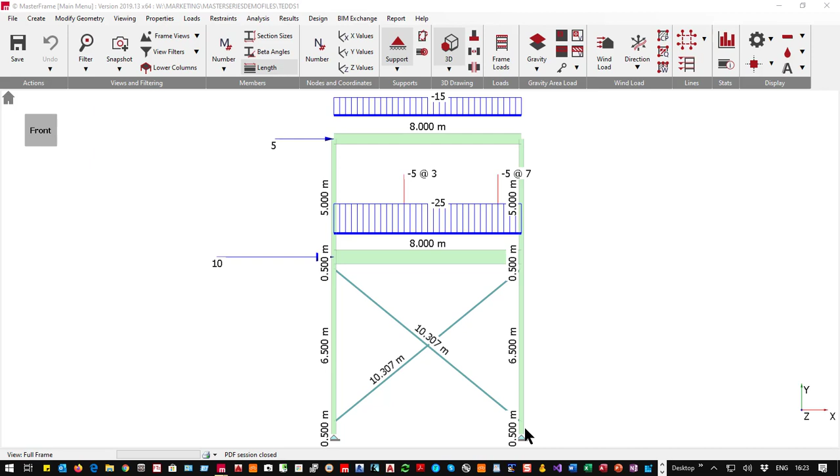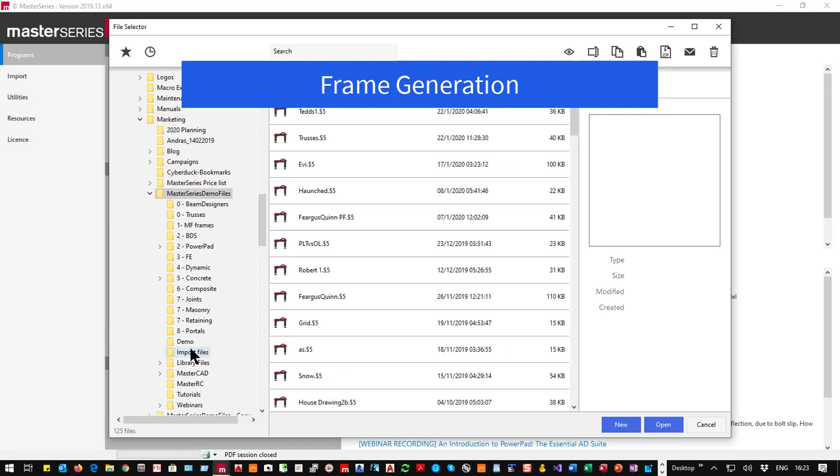So if I just come out of the software for a second, all the way, and start the MasterSeries, I'm going to start just as a PowerPad user and take a brand new file in MasterFrame, which is part of PowerPad, and we'll just go into the PowerPad directory and we'll save it as a new file called ppframe and create new.

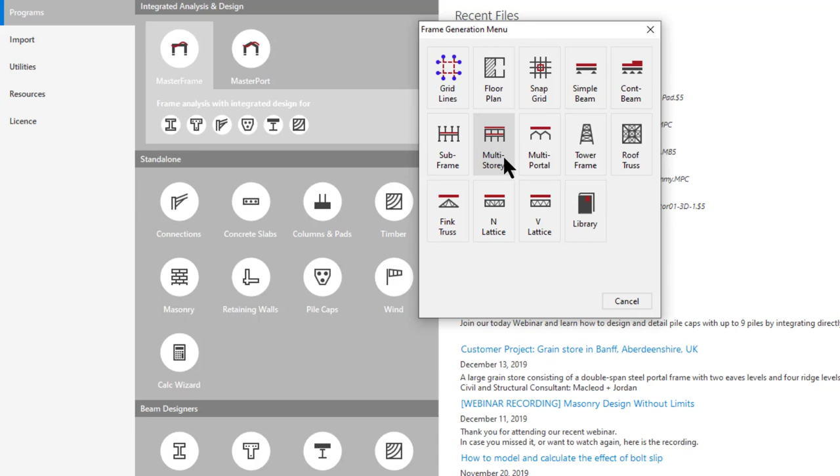So here we come with the basic preprocessor, and we could use the subframe or the multi-storey to start this off with for us, but we're not going to. We're going to do this all from scratch to show you how easy it is to do it from scratch. So snap grid, put it in the front view.

I'm going to do the columns first, so I'm going to choose a UC default column, and we'll come down to say the 23, and we will start at the bottom and we'll come up 7.5 meters, and then turning on my node points so I can see them and making them slightly larger.

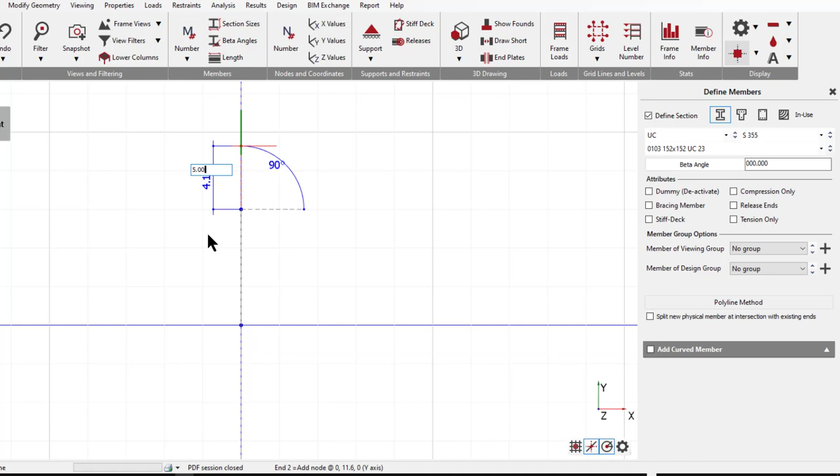There we go. I can now do another one that is 5 meters, and I don't have to go like that. I can go 5, 0.00, or input the coordinates on distances just like in AutoCAD. And I'll do the same at an 8 meter off center. So I'm just going to hover here and come across exactly 8 meters, type it in, it's quicker, and I will notice I automatically get a snap to the horizontal above that and to there.

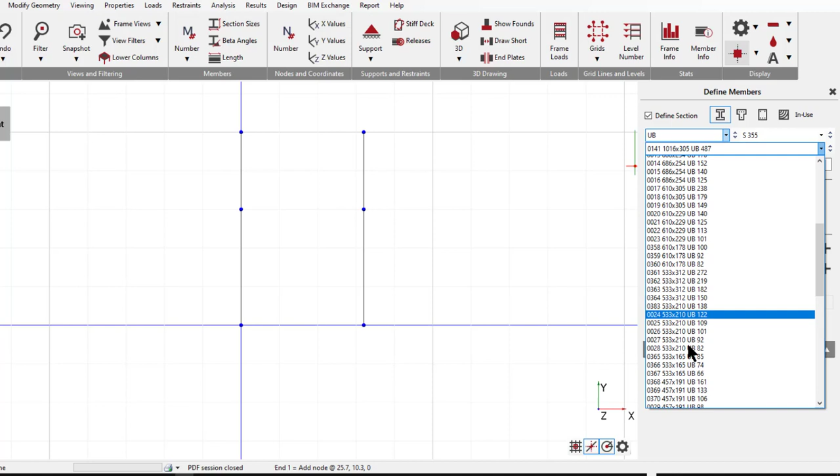So now I'm going to put in beam sections. So UBs, very simply, we're going to choose a 406 by 46 initially, and we will pin the two ends of the member. So we'll make it span from here to here and from here to here.

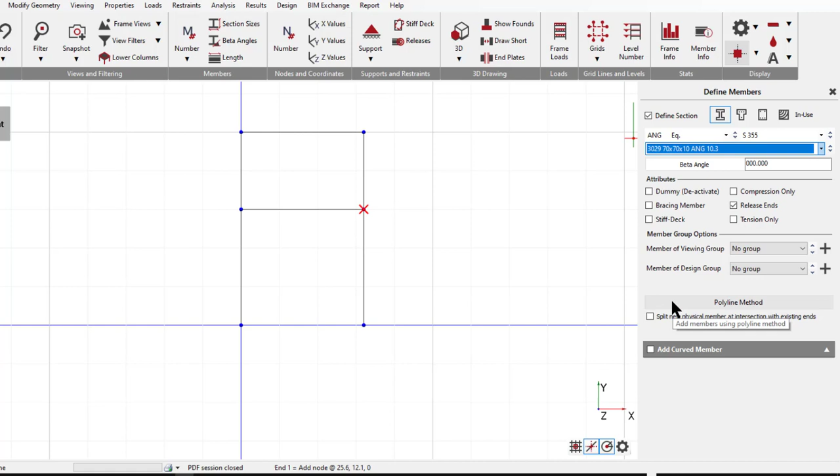And then we'll create some bracing members, and I'm going to go for an equal angle and use the British angles, and come down to a 70 by 70 by 10. So I'm going to make it releasing. I'm going to make it tension only as well.

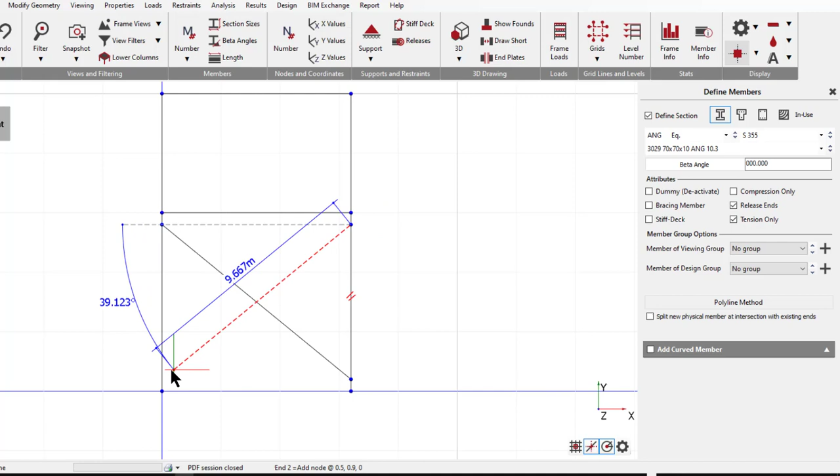So I'm going to do cross bracing, but I'm not going to put it node to node. I'm going to give myself a wee bit of room. So what I'm going to do is I'm going to come down 500. So just zoom in, and then I'm going to come up 500. So it's more realistic, because normally they aren't connected exactly at that. So those two are in, and I then just close that, and I don't need the node points anymore.

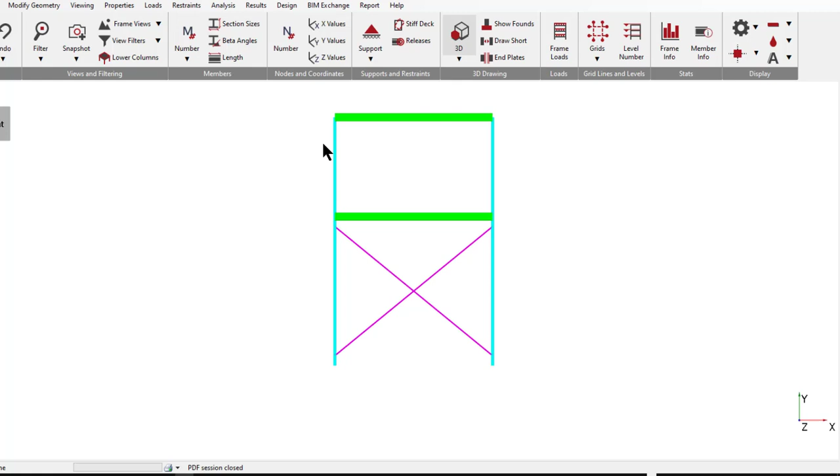Turn on my 3D, and I'll see my basic profile. And if I ask the color by section, you'll see the 3 different section types that we have used, and we could even ask for a legend on those if we wanted to, just to confirm that they are all default sections and they're all 355.

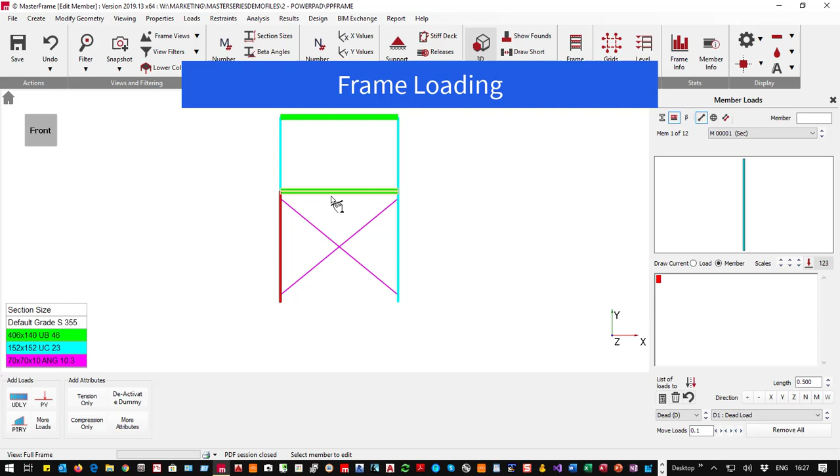So now I want to put some loading onto it, and we go to loads and member loading. This is a plane frame, we're not using area loading, so we just go here, just get rid of that little key diagram, and I'm going to put onto this 2 UDLs plus 2 point loads.

So the first UDL is going to be a dead load of say 5 kilonewtons per meter run. The second one's going to be a live, so L, and it's going to be 10. And then going to have 2 live point loads of 5 kilonewtons each at 3 meters and 7 meters.

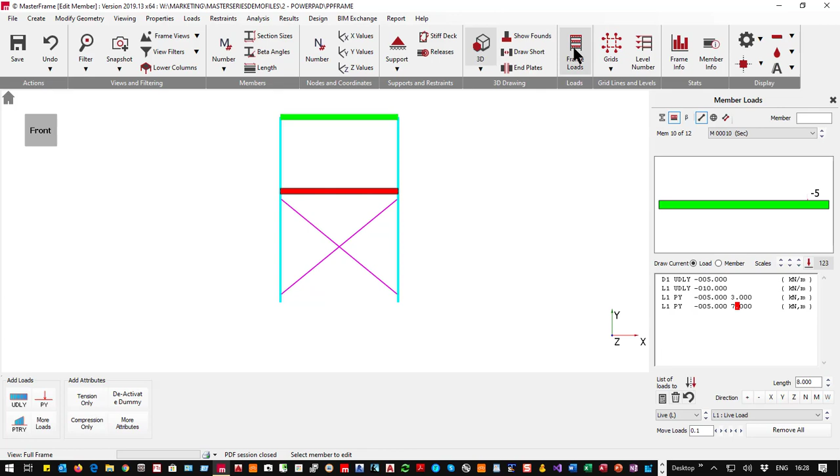And if I want to, I can see those on the frame by asking it just to draw the loads, and I'm going to ask for all loading cases and just minimize that, so we can see our nice little pretty diagram with our point loads and our line loads on it. So at 3 meters and 7 meters, so off to one side on the frame.

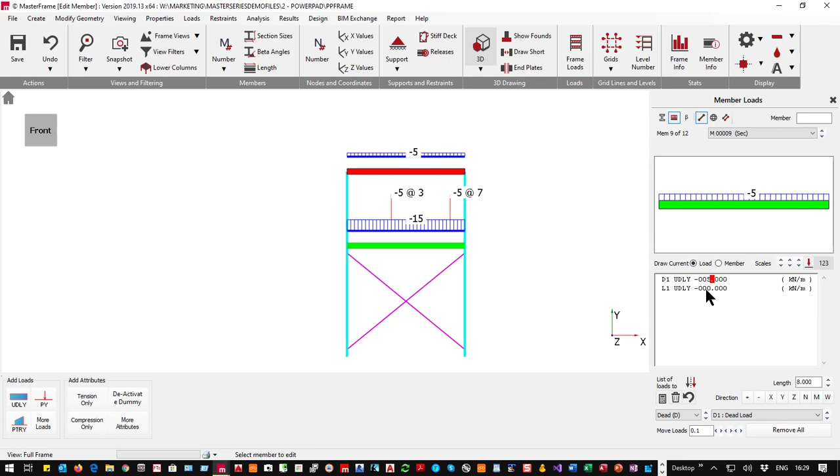I'm now going to go up to my upper level, and I'm going to put in 2 new UDLs. I'm going to put a dead again of 5, but this time I'm going to put in the live as 10. In fact, I think I possibly did the bottom one wrong. That should have been 5 and 12. The live load was a bit higher there. And yeah, that's fine. So there we go.

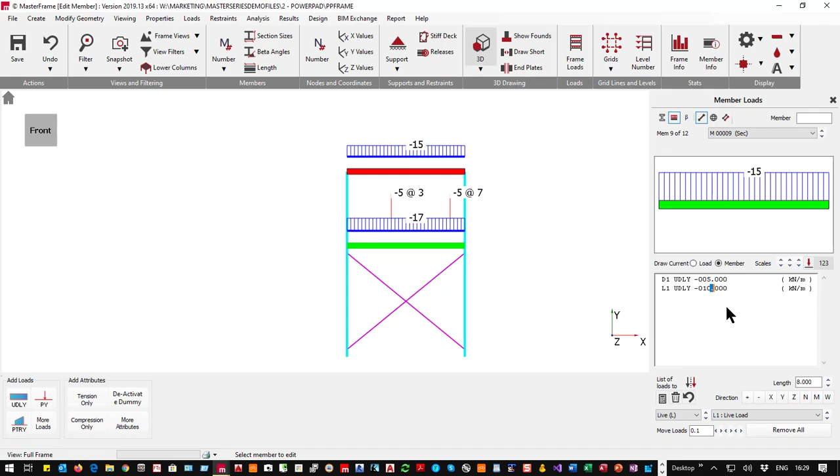There's my basic loading. I need to get some nodal loads on to the two ends of the members, and I can put those on directly as end of member loads here, but it's better to put those on as nodal loading. So nodal loading, and I'm going to choose this point, and I'm going to have it as a wind 1 load in the x-axis, and I'm going to make that 10 kilonewtons.

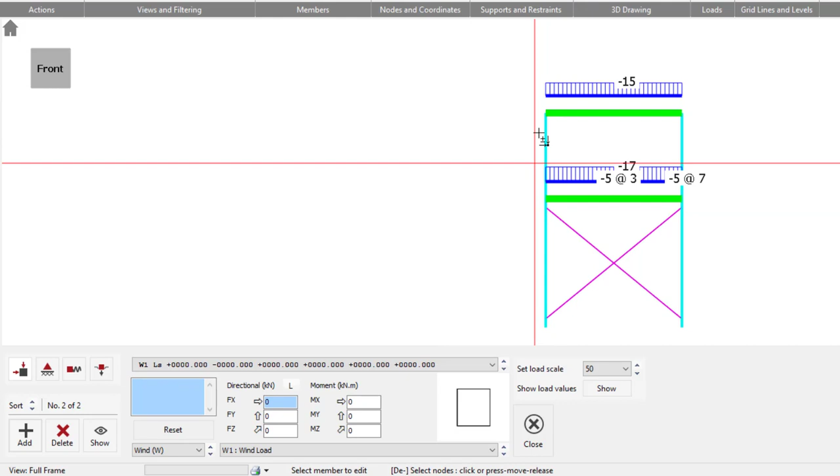And then I'm going to add another one, so second group, and it's not this node or that one, it's this node up here. In this case I'm going to make it 5 kilonewtons. So we have these two nodal point loads coming in, so 5 there and 10 down there. And if we just scale up, we should see those. It doesn't show those both at the same time, it only shows the one I'm interested in. So that's very simple, very, very quick to do. And I'm just going to close that down. Or no need to close down, just go to the next function.

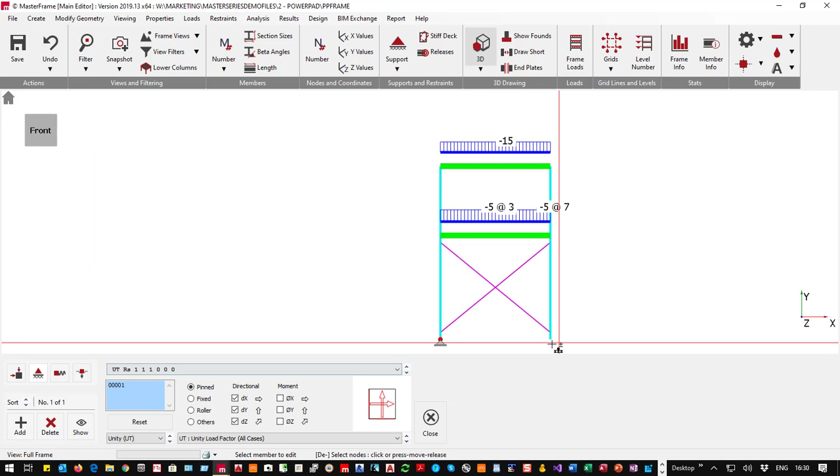The next function you want to look at is putting some supports in. So releases, member end releases, static supports. So I'm going to put in a pin support here and a pin support here. I'm just going to turn off the load diagram because I don't really need the loads anymore. There we go. So two little pin supports. If I look at my member end releases, we will see that we've got pins here, here, and here, and here, and here, and here. Oh, don't need that there. And that's all I need to do.

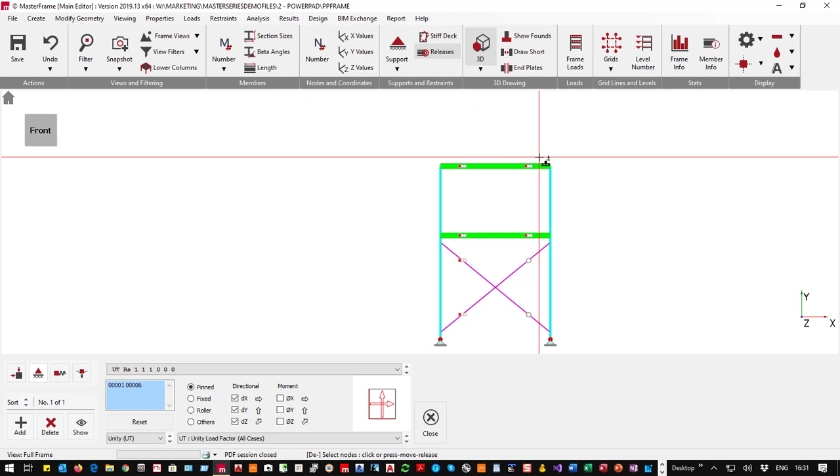My last thing I want to do is look at the loading combinations. So loads, loading cases. I can create those manually, or I can just go into auto and say, right, for dead plus live, I want ultimate and service to 6.10 A and B, and I want notional load at 0 and 180. So plus and minus.

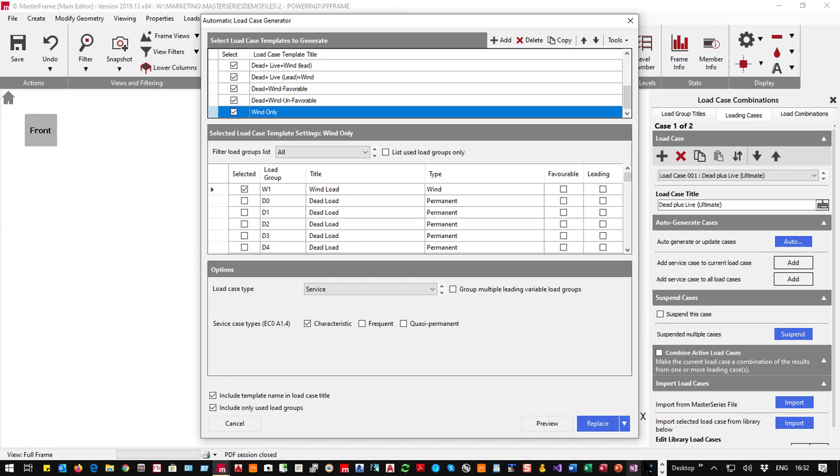Live load only is useful, dead load only is useful as well. Dead plus live plus wind leading, and dead plus live with the live leading plus wind, and dead plus wind favourable and unfavourable, and in case somebody wants it, the wind load only. So I'm just going to add all those in, replace the existing loads, and analyze my frame. Static analysis, very straightforward. You can see notional horizontal loads added as a plane frame.

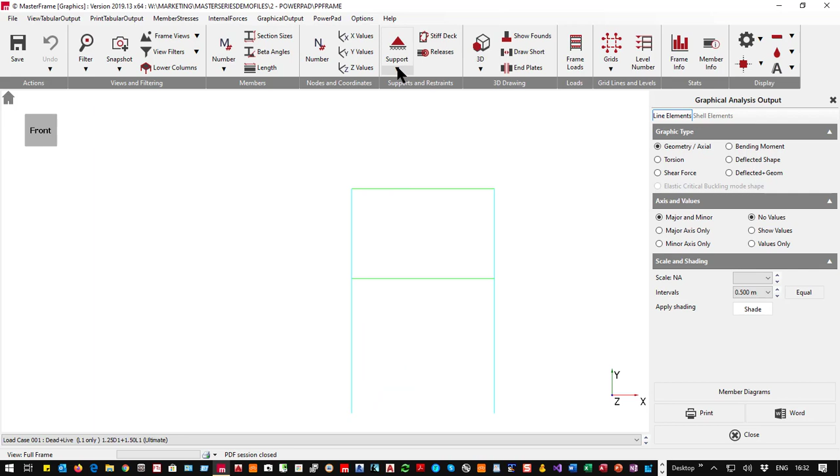And walking across, I now am into results, graphical results, and we can turn off the 3D and we can turn off the fancy coloring. So it's just a simple black and white in front view. There we go. So bending moment diagrams, as you would expect under the dead plus live, we get our normal diagrams. As we move over to dead plus live plus notional, because these diagonals were tension only, it's taking this one into effect, and it's not taking this one that went into compression, so it's taking the load in this one, and it's not a large load.

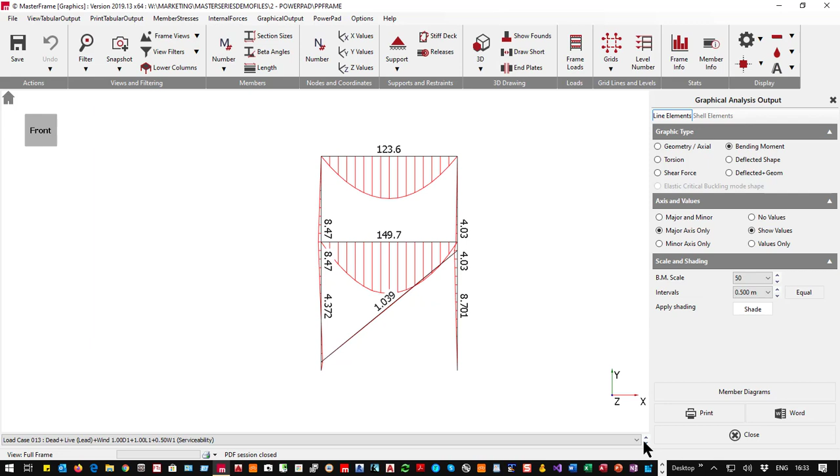And then we get into the wind only, and we can see the higher and higher loading building, and that's actually the moment. So if I actually go to axial, we'll see the 14 and the 42 kilonewtons coming in as our bracing loads. And we can see our deflected shapes as you would expect. It's sort of like a propped cantilever because this brace holds this all in place here, and then the top half cantilevers out. So the cantilever is much more onerous than the first part, but it's fine.

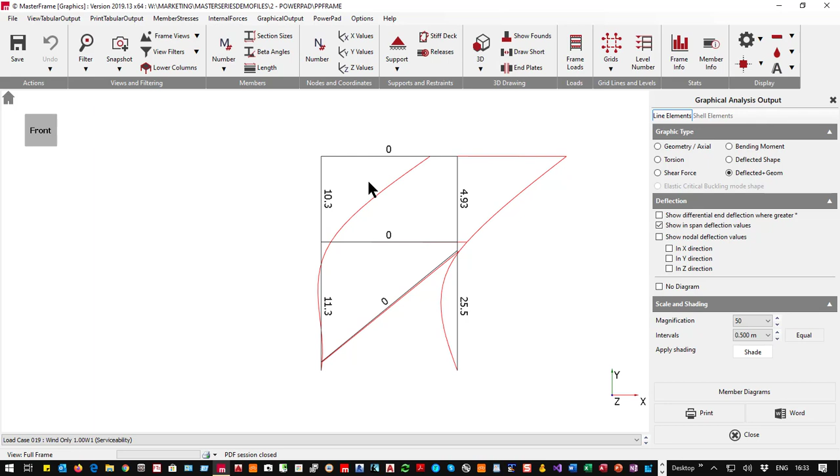We could make things better by making that a fixed connection, and that would be easily done. In my case, it's all pinned. So let's go and design it. And what I'm going to do first of all is I'm going to set up some rules for the design.

I'm going to tell it I want to do an axial with moments on columns. So let's label it up, and I want to apply this and this and this and this all as one column, as 4 different columns, 1L, and keep them all the same section size.

And then going to add in another one for the 2 braces, and these will in fact be strut and tie. And because it's angles we're choosing, we really should think about holes. So we're going to have one number 22 hole, and just play safe, put it into both the web and the flange, and everything else is fine. And then add in, and that's brace, always helps me put a name in.

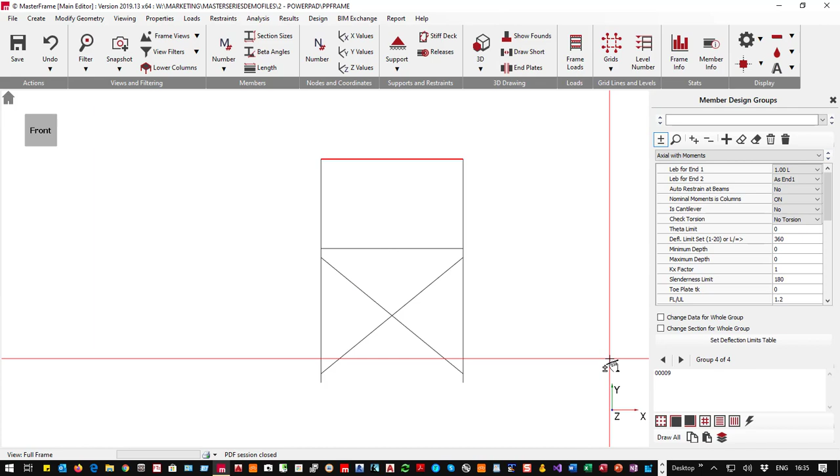Add another one in, and this is first beam, and it's going to be this member, and it's going to be 1L, so unrestrained, or it could be fully restrained. Let's go for fully restrained. Whatever's sitting up here is going to be restraining it. And then we want to do the other member up here, but this will be unrestrained, lighter load and unrestrained. Because it's only one member, we don't need to tell it to change the data for the whole group.

So here we go, and we go into our design, steel member design, and we'll find we've automatically got our design checks, and we'll see that we're getting our loading here. So our axial with moment on the first portion, on the second portion. So the upper portions are okay, the lower portions are a wee bit, because of this moment coming in here with the push-pull and everything, a wee bit unhappy.

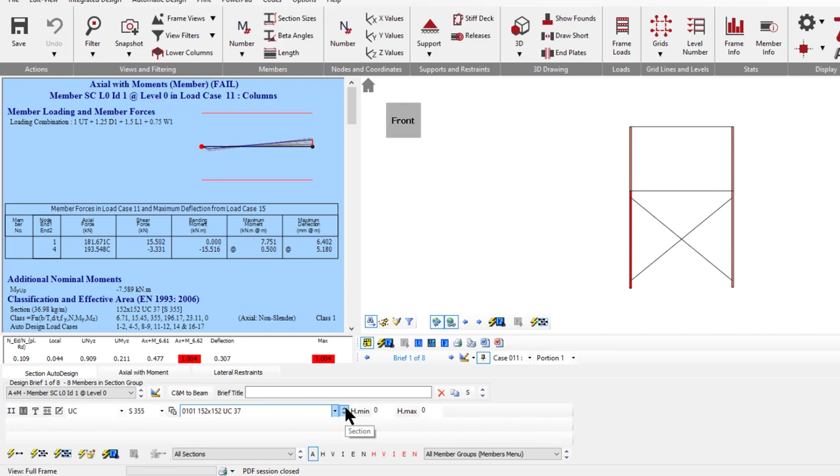So 152, let's change that to 30, no good. A 37, not very good, still getting there. And a 44, but for the same benefit we could get a far more robust 46, easily obtainable UC, and if we then just check that, it works for all 4 of those. Our bracing members coming along, 70 by 70 by 10 angle is working for this one and for this one.

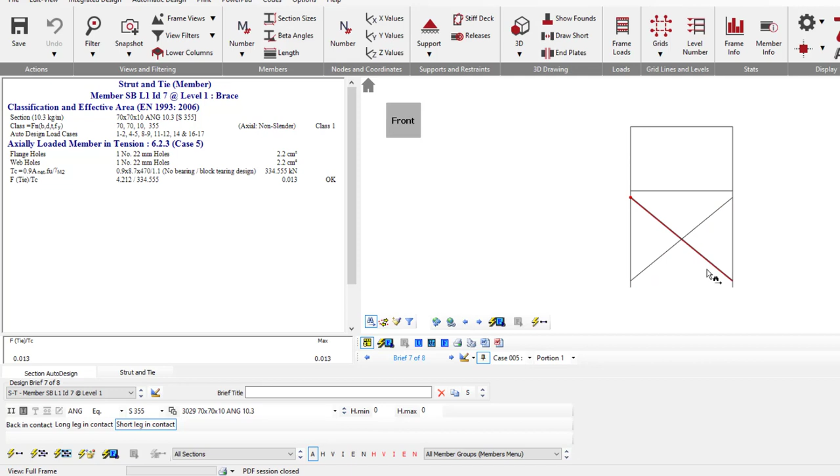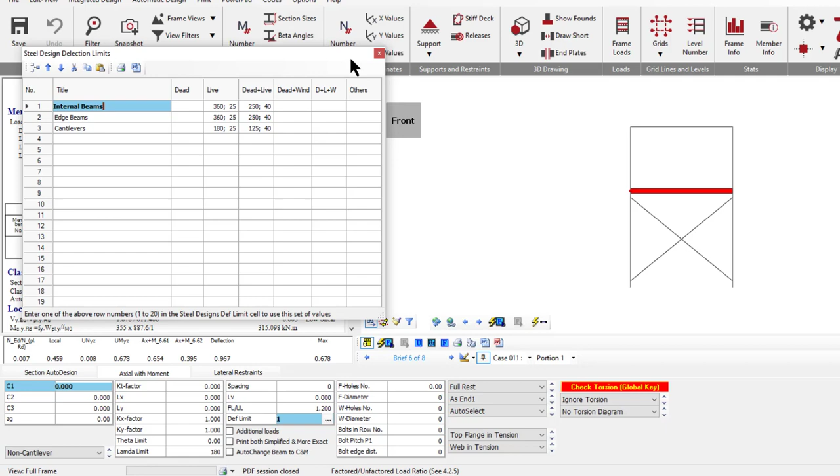My upper beam, sorry, my lower beam is failing on deflection. At the minute it's taking 1/360, the default deflection. I'm going to come along and change that to 1 in 1. What that means is I'm going to use a table where I'm telling it 360 live but 250 dead plus live. And now the section works, fully restrained.

And if I ask it to auto size, so walking down we'll see that the section's not working. If I sort by weight order, I'll get a more optimum result. And there we go, 457, 152, 52 is working. And if I move up to the top member, which is more onerous because it's unrestrained over its full length, again we'll go for the 1 in 250 for deflections.

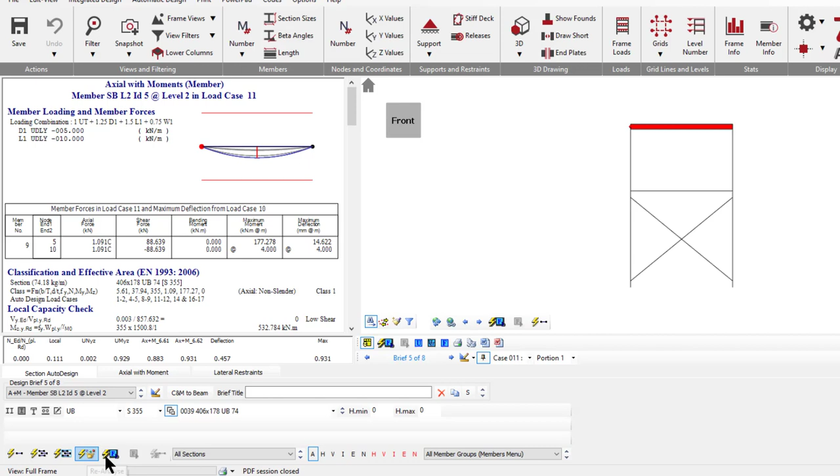Back to here, and we will try and find that it's a 406, 178 by 74 is the first light section that works. So we've chosen our new sections. Always important to reanalyze with the new sections and then to re-scan for any failures, and we'll find that nothing is failing, everything is perfectly good. Now we've got our frame designed.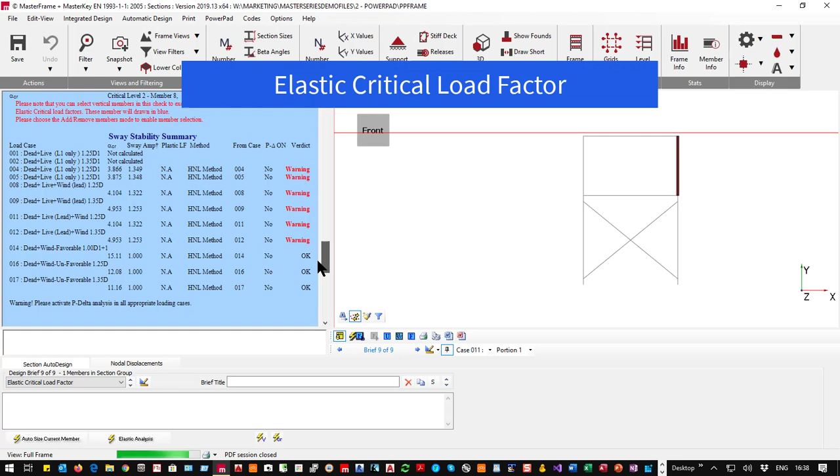If we're worried about P delta analysis, we would have to consider lateral torsional elastic critical load factor, which is throwing up alarm bells and telling me that I do have problems with the structure. So it's very flexible. Just coming back out as part of the design process and going into second order, I'm going to ask it to do a P delta analysis.

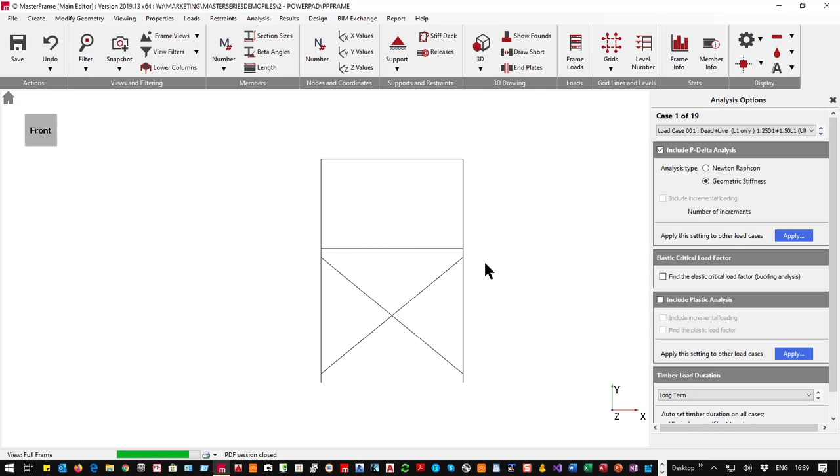And I could argue that it's geometric stiffness matrix method because it's a multi-story braced rather than unbraced type frame. And then I'm going to apply that. I'm going to just say put it on all ultimate cases and apply. So if I now go analyze static, you'll see P delta is applied, plane frame, and of course we do find that it's unstable because it's just too flexible.

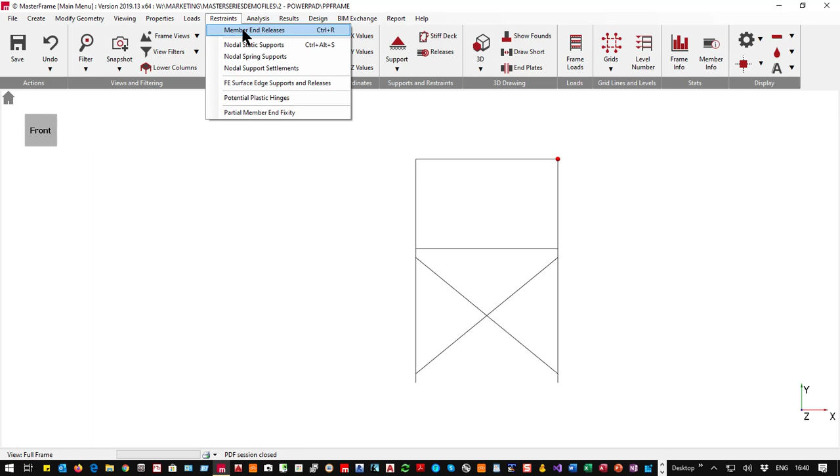DX on node 10, and I say no. Up here it's just moving. Remember, if we had this curvature. So what I'm going to do, very simply, is I'm going to go and remove the end releases here, make this fully fixed up here. Down here will be okay. And reanalyze, static analysis. And we should find that it's still a wee bit flexible. I need to possibly increase those sections before I go on to make this work under second order processes.

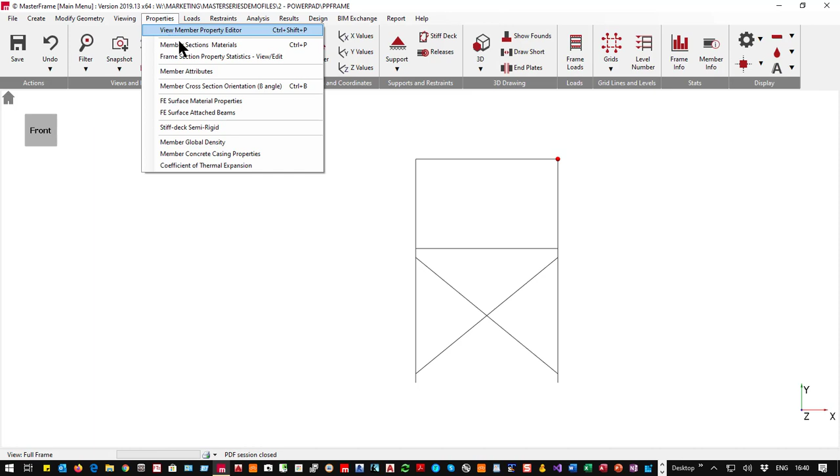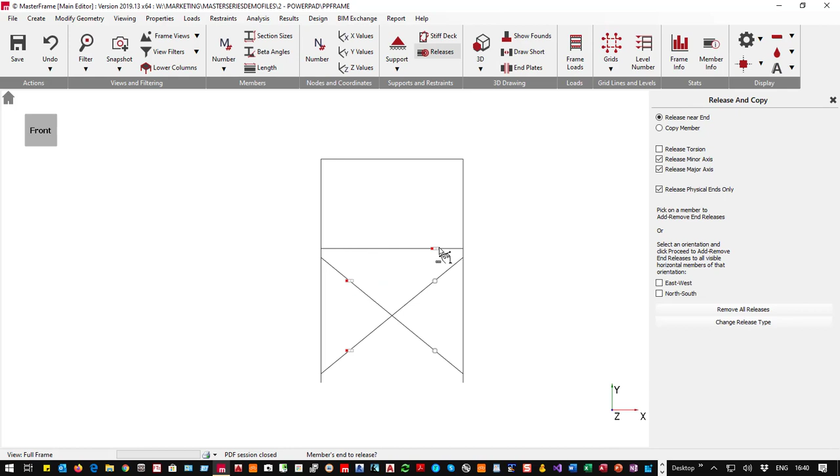So properties, sections, take these and change them to be the 60 kilograms, and that's going to have that effect on all of these. And bear in mind we're still pinned here. What we're going to do is we're going to turn around and take off these so it's a portalized and braced frame, and analyze static.

Here we go, and back into design, steel member design. We'll find the columns all work. The beams now work a lot better. We could get away with lighter sections. So sorting by weight order, we could come down to something a lot lighter.

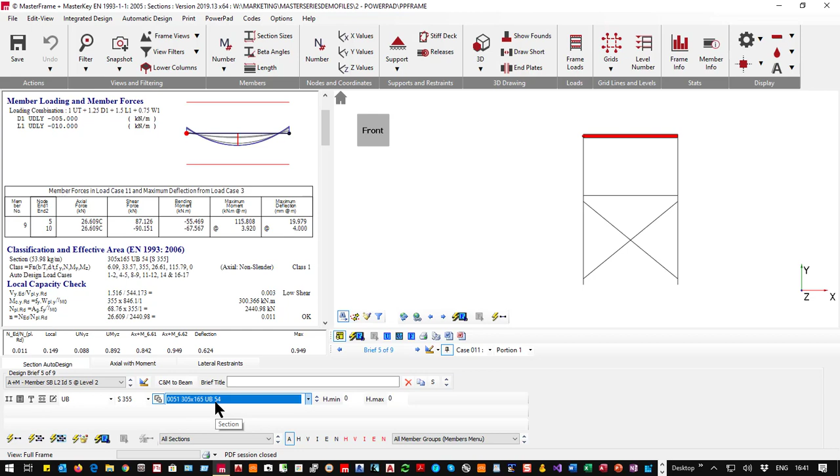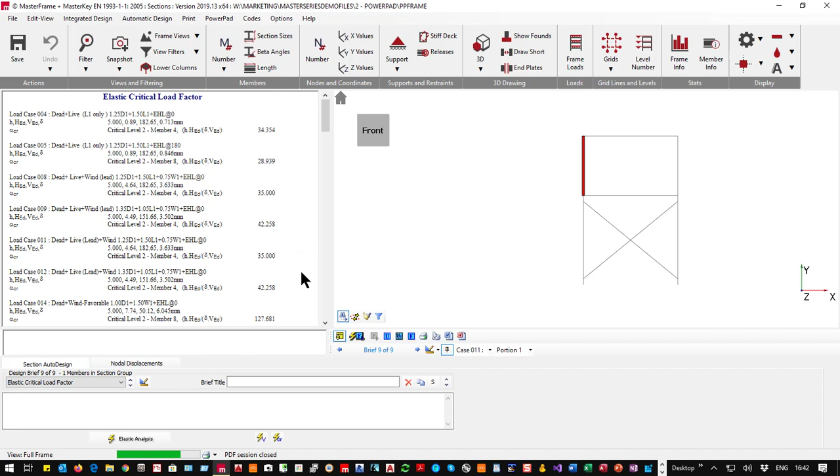And also, if I look at the last design check, that last one, it's happy because we have notional loads applied to the structure, and say yes. Now if we go in and look at the connection design, again, all part of the same PowerPad program. I'll just accept the default, but we will not have any brace tie forces.

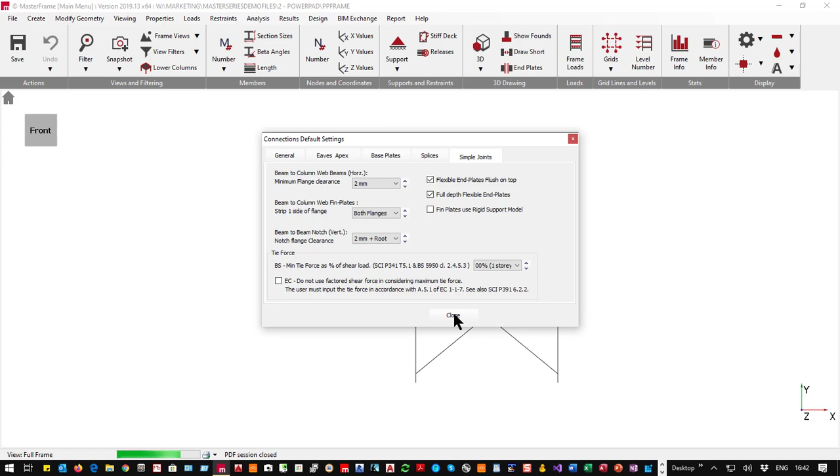Beam to column flange, yep, we're going to have one of those. And it's going to ask us where. I'm going to do this one first, just there, and we will see that the default with 3 bolts in works. And I can just scan through the cases and see yes, that works. And we'll just check it on the other side, apply to the other side, and scan, and that works.

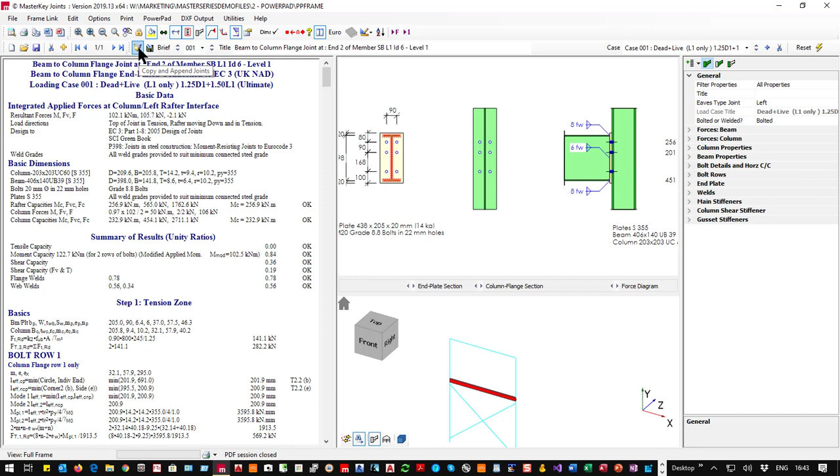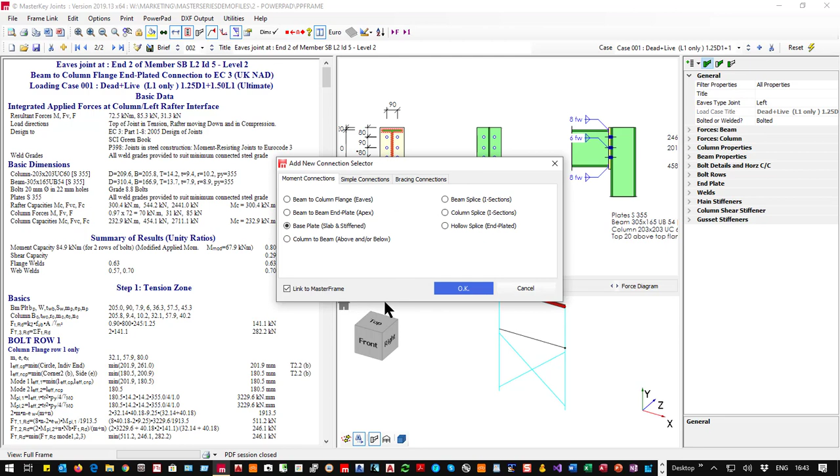Add another joint. In fact, what we'll do is we'll copy this one, and then we will apply it to the upper member. And again, similar configuration, just scan for failures. Everything's okay. Let's pull this up, add a third joint. It's a base plate, and we'll add that down there because the wind was pushing in that direction, so it's more onerous.

And with the default slab base plate, do we need to enlarge it? No, we don't, so we wouldn't need to enlarge it. And if we apply that to that member instead, and then just scan, there's no problem there either.

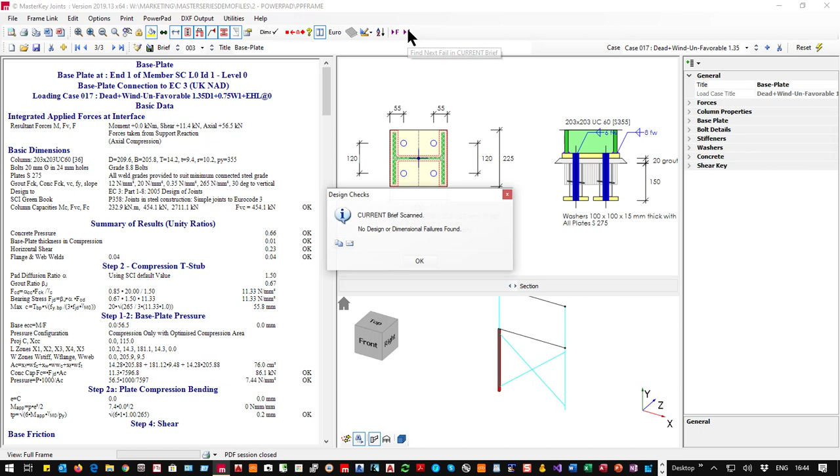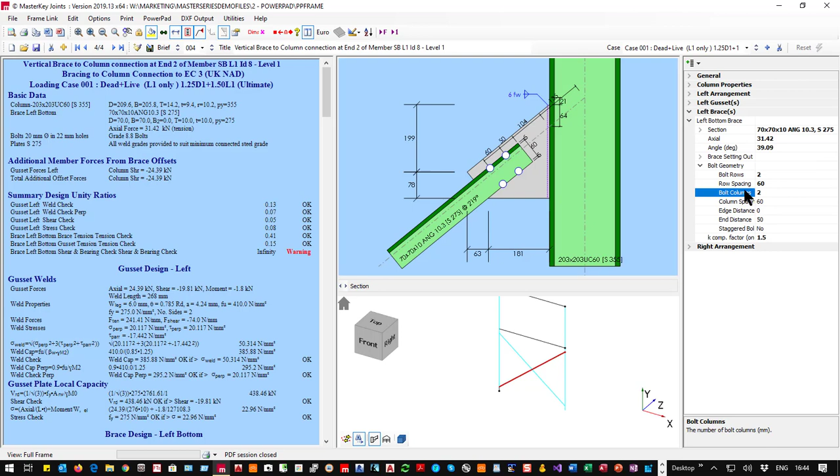So finally, the bracing. If I add in another one, and we go to our bracing members, and we're doing vertical bracing to a column, and say OK, and it's going to say where, and I'm going to say here, and we will see that we just need to get the bolts right. The bolts are not right, so click on the bolts. I'm going to say 1 column of bolts down the middle. Everything's fine. Everything works nice and neat.

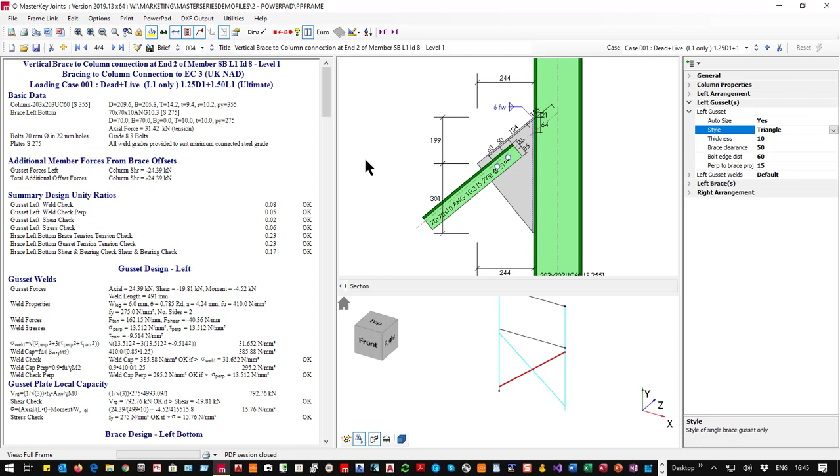We can also turn around and say no, we don't want a knuckle. We'd prefer to have a tapered straight or a triangle, which is quite nice and neat, and have that all sorted out and done quite neat. And that is all your connections done. So frame analysis, steel design, connection design.

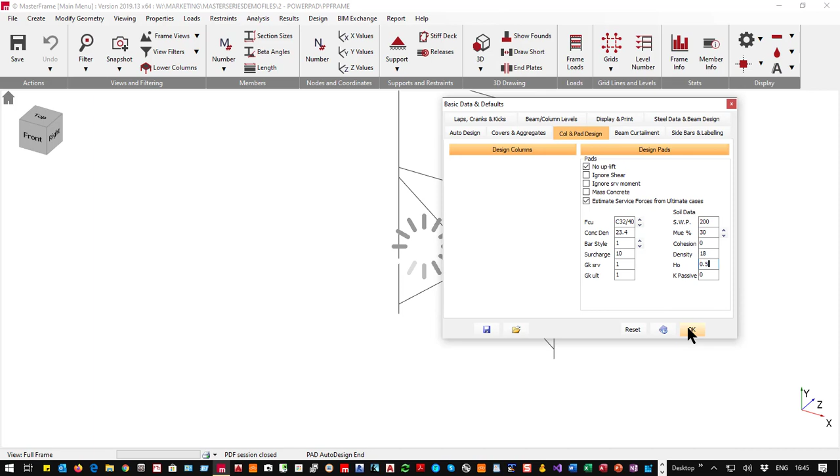Last thing to design is concrete pads. We're going to go for C32/40 concrete, and safe working pressure, we're going to go for 200 Newton, and we'll have no additional, we'll be buried 500 below ground. You'll find that 1300 square by 450 will work for that pad, and for this pad it's slightly less.

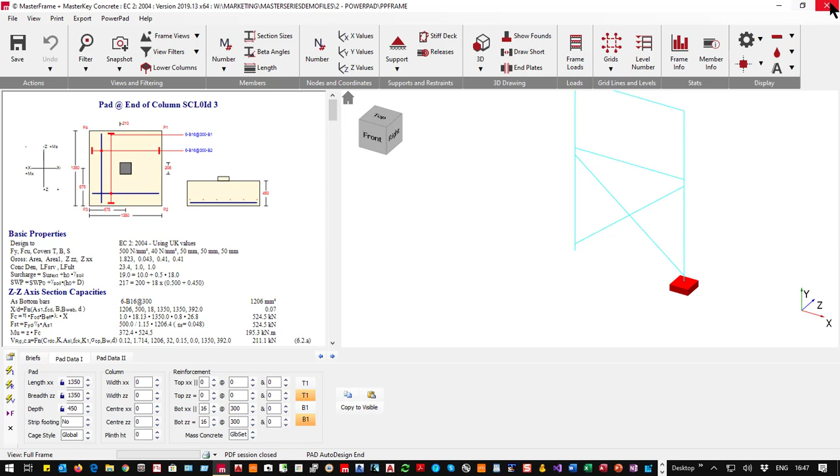I'm going to ask it to resize it, and I'm going to make them both the same, so 1350 by 450, and I'm going to make this one 1350 by 450. So that's a quick 20-minute tour around PowerPad doing a full steel design on a frame, doing this analysis, the connections, the steel member design, the bracing design, and your pad foundations.